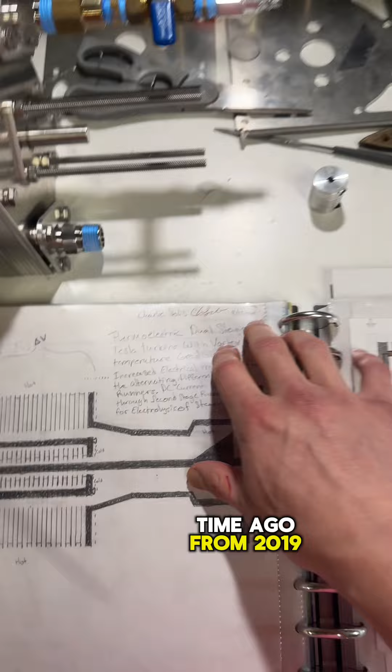So I want to show you all something today with the Tesla turbine that I came up with a very long time ago. Around 2019 I had at least drawn this, but I figured this out a lot earlier.

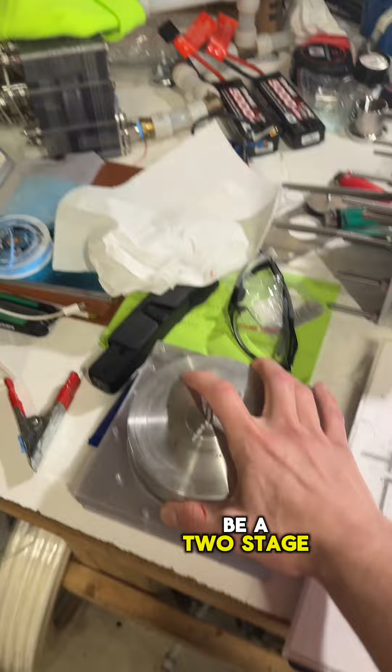So I had been working on the turbines. This was one of the very first ones I had. Maybe you can see through it. Yeah, you can see through it there. This was supposed to be a two-stage, kind of like this, but it was just missing the center. So it went into these small ones right here, and then there's holes inside of here. You can't see that transition between the two stages.

Well, the point of all this was, one of the original design features that I had put into this system was that I had come up with a thermoelectric disc stack, where each of the discs of the turbine was made of a different type of metal. If you look here, I'll pull up a thermoelectric. You use two dissimilar metals and you have connecting tips, and then you have them connecting at the bottom.

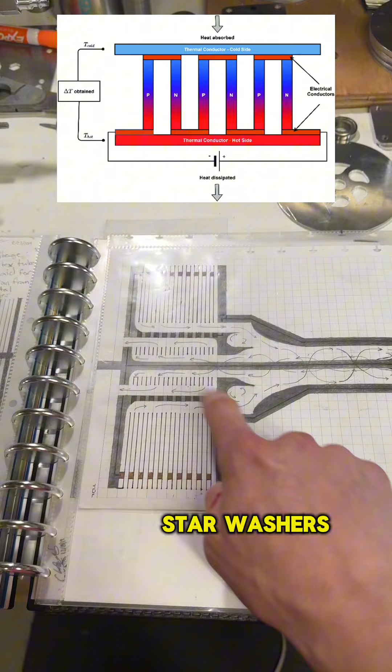And what this would require is alternating conductive and non-conductive star washers that provide the every other connection. And then up at the top here, we do alternating conductive, non-conductive spacers. I have mica spacers and I had copper spacers to do inside of here. Ignore the blood on my hand.

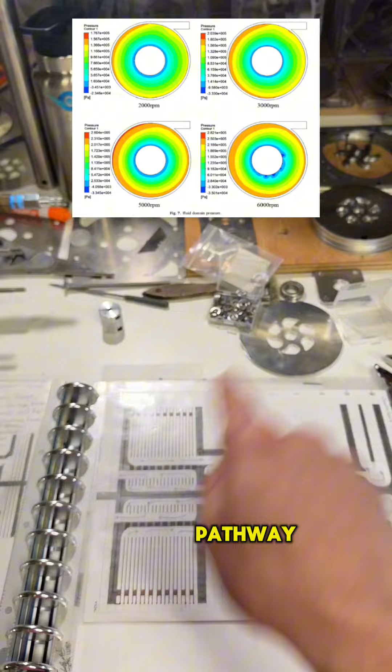These discs get sharp. So the point of this was, when you have a Tesla turbine, the fluid does expand first in the nozzle, but then it still has a chance to expand through the spiral pathway going through the turbine. If that motive fluid is expanding going through the turbine, that means it will be cooler by the time it gets to the exhaust in the center. What that means is there will be a temperature thermal gradient from the tips of the discs to the center of the discs.

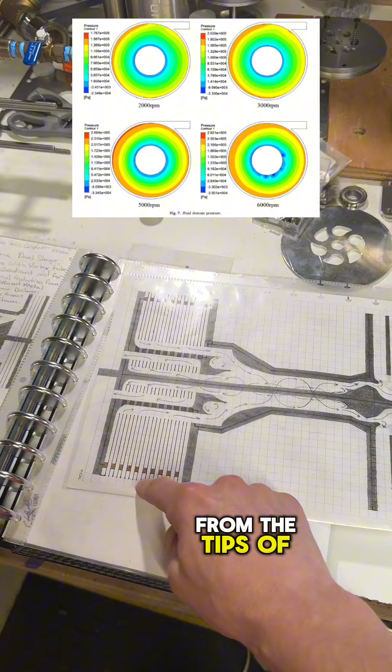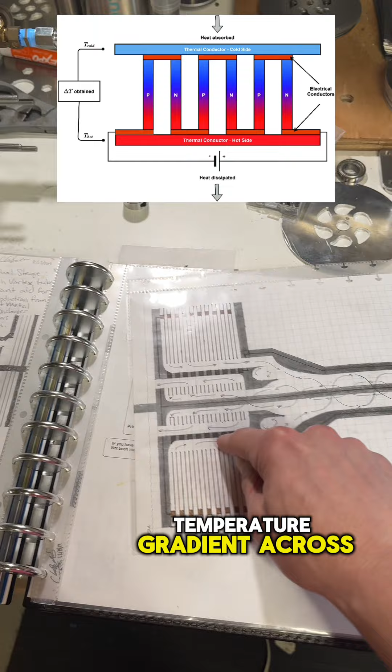As such, with this thermoelectric disc stack, with the proper alternating star washers that are conductive and non-conductive, and alternating tip conductive and non-conductive spacers, this creates a thermoelectric circuit. The radial temperature gradient across the disc stack from the tips to the center generates a DC current flow through the axial direction of the disc stack that snakes up and down.

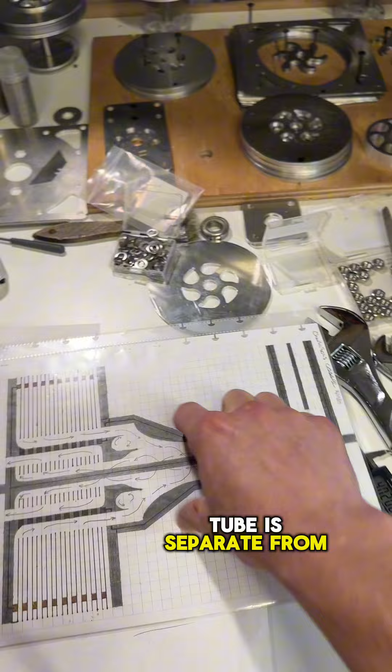What happens here is you take this current and you discharge it so that this tube is separate from the center shaft, so that the positive goes to this center shaft all the way to the outside set of plates, and then the negative goes around the tube on the outside and goes to this set of plates.

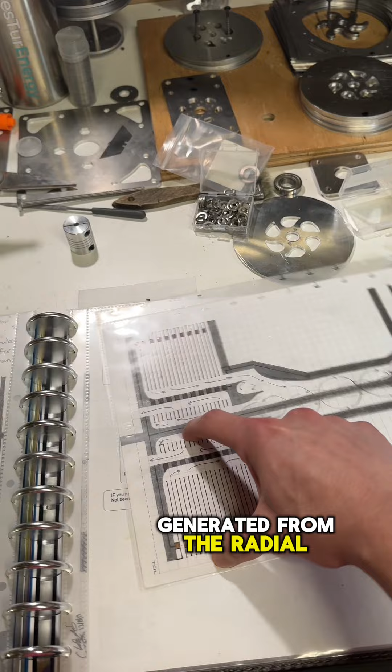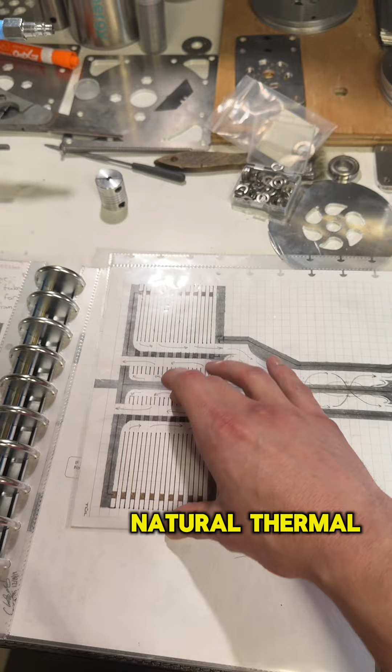So whatever the potential gradient of voltage across the disc stack here, generated from the radial fluid temperature gradient, will produce a voltage potential across the second stage disc stack, which is then used for electrolysis of any remaining fluid. We're already going to have this natural thermal gradient, so by utilizing this to make electricity with it, it actually turns part of the turbine into a solid state electric generator.

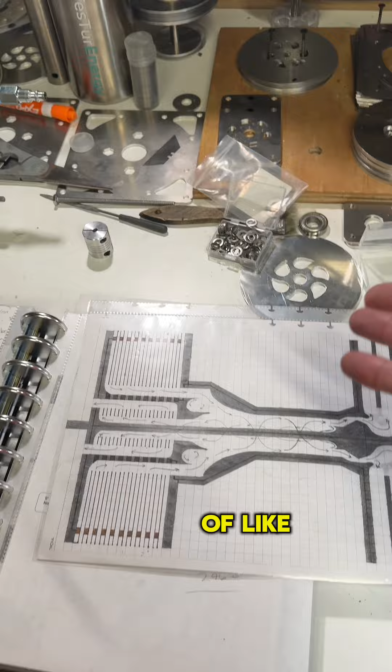Why that's cool is that means inside of like a plane or a turbine or a turbojet engine, before the turbine's even spinning up, you could use the disc stack as an electric generator to power onboard electronics or whatever you want inside the thing, without having to actually have the turbine even spinning.

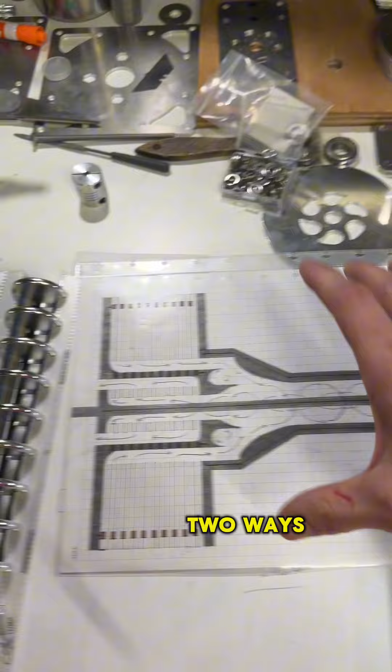That's the whole point, was that it has two ways of making power. Once with rotational mechanical power, and twice with the thermoelectric effect across the disc stack.

Corollary, then, using that disc stack in a many disc stack electrolysis device, you then get a thermoelectric hydrolysis Tesla turbine that uses the thermal gradient from the radial tips to the center to produce a DC voltage potential.

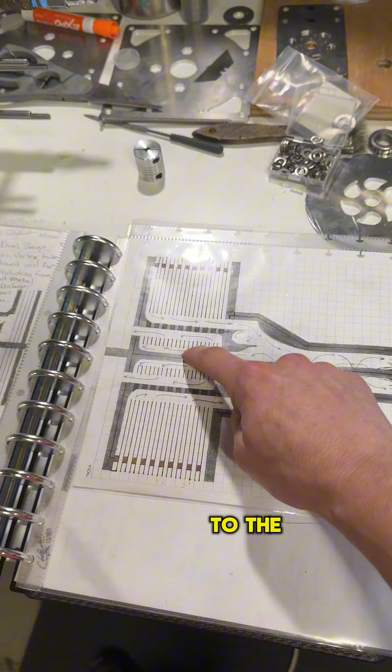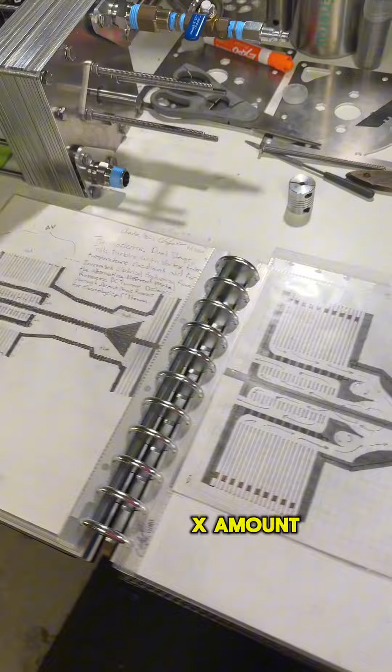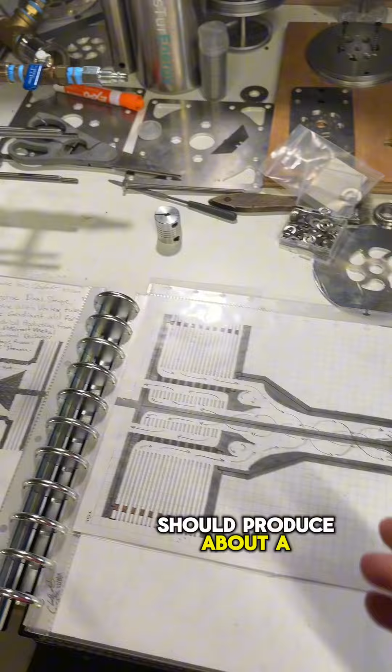And now the math I had done was I needed about 5-inch discs and about 100 of them. Basic calculations, experiments that I found online, being able to produce X amount of voltage with a single strip of metal that was about the same length. And I did the calculations. About 100 discs with an 80 degrees Celsius temperature gradient should produce about half a kilowatt and be able to attain at least a 1 to 3 voltage potential.

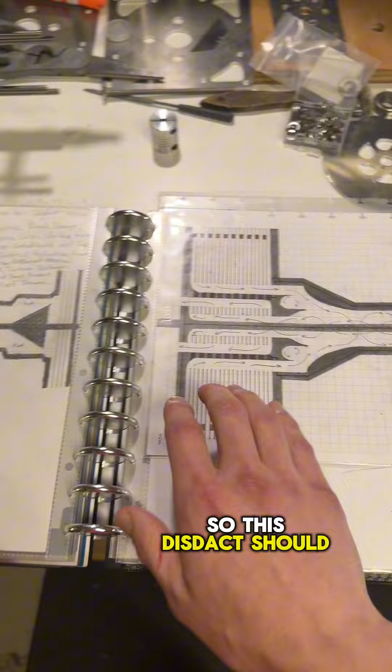And if you know electrolysis, you need at least about 1.4 volts. So this disc stack should be able to generate at least exactly enough voltage to start electrolysis of any sort of condensate that's flowing in the exhaust of the gas turbine, and or if this is a steam turbine and this condenses anywhere.

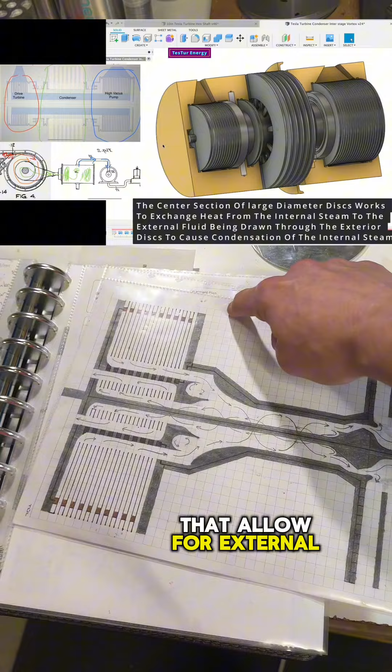If you check out my other video up here, I have what's called the interstage heat exchanger. This makes these tubes here be a bunch of extra discs that go up much further here that allow for external air to come through, go through the extra outside discs, and that cooling, the air coming through, provides cooling. It cools the flow of the fluid that's going through the center here, and the natural rotation of the turbine allows for it.

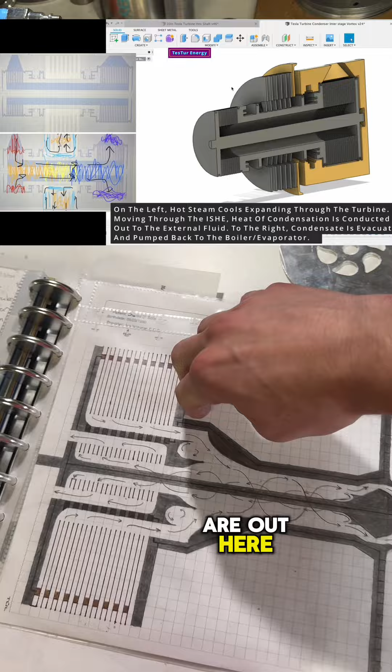Like the discs that are out here provide the heat exchange area and provide the way of wicking, or provide the way of pulling the air and pushing it through, because the disc stack on the outside here works like a blower or a compressor.

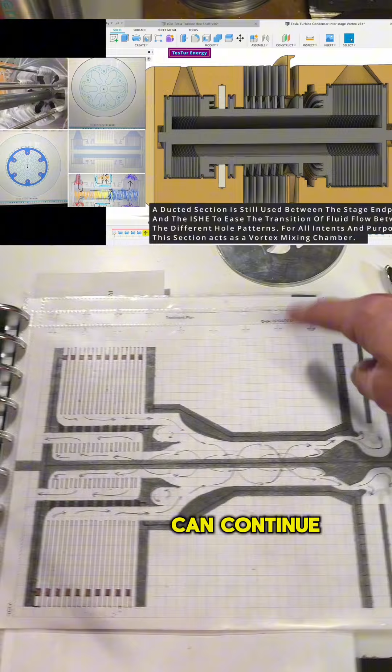So the whole rotary system spinning, hot fluids expanding through here, going through here and out to here. This would be isolated from here. You can see this better in my video, but having this interstage heat exchanger, we can remove heat from anything that's in here. And of course we can continue that thermal gradient across the radius, thermoelectric stack of all the discs.

This temperature gradient here further adds to the power output, or the voltage output here. But if you cause some of the steam coming through here - I think the test I had looked at was an 80-degree gradient from 200 to 120 degrees Celsius.

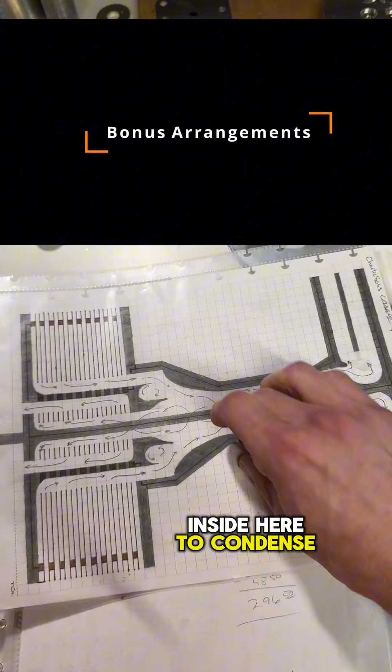And as such, if you can cause any of that steam inside here to condense via the interstage heat exchanger, which preheats combustion air with the heat wicking off the air as it's being flung through it with the rotors, then this moisture that's condensed in here goes into the electrolysis disc stack for electrolysis, to be burnt in a second stage turbine.

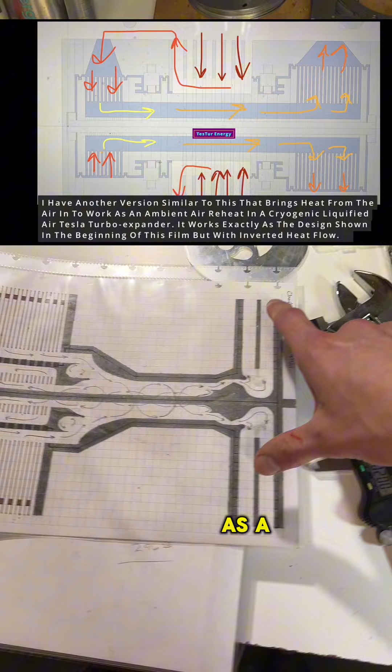And then this disc stack here also works as a second stage high vacuum pump on the exhaust of this. And then this can be doubled up - you can make it dual-sided so that you have positive on this side and negative on this side, so you can collect only hydrogen on this side and only oxygen on this side.

As well, it also works as the compressor for it because it's a disc stack compressor. Separate, so you don't have to worry about any sort of combustion at all.

The really cool part about this is, beyond all of this, I even further took this interstage duct and turned it into a vortex tube, because the fluid coming in is going to be rotating, and as it decreases in radius, it's going to spin up, as this whole thing is already spinning too.

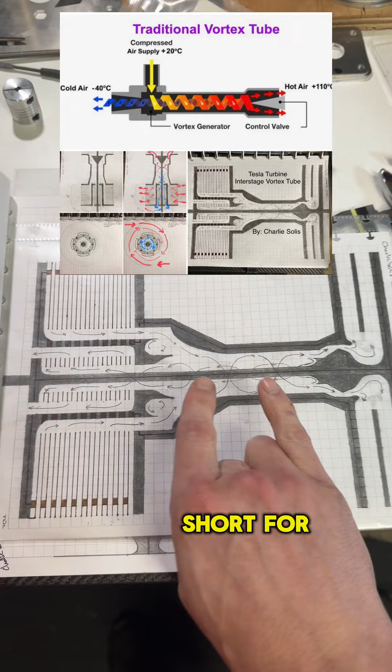The fluid going through here will speed up in its rotation as it comes here. Again, this needs to be long enough - I did it short for the sake of being on the paper and clarity.

But having this vortex tube means only the hot air will come out here, and the thermal energy can go towards some of the electrolysis. It won't be a lot, but it's some.

But why this is the most important is that the colder air is then sucked through, or pushes its way through the slight vacuum, that the inner half of these discs works as a second vacuum pump.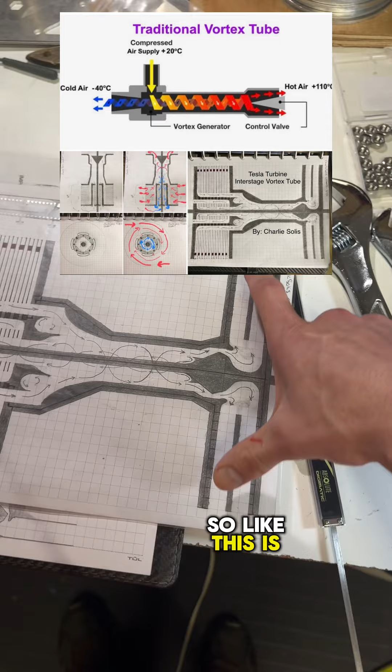So like this is a really large one, but these inner discs allow it so that the fluid comes through here, and then this little short distance of the disc stack - it won't be a lot, but it'll keep fluid going out. As the discs rotate, it draws it out, and then it comes out here.

But out here, the fluid being drawn through here will be cooled, which will further cool this side of the thermoelectric gradient, so that you get an even higher potential output.

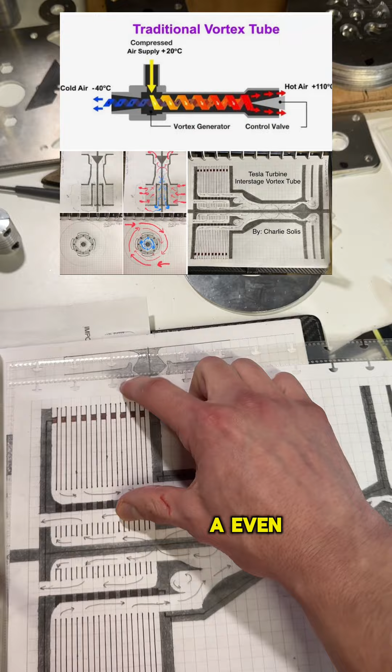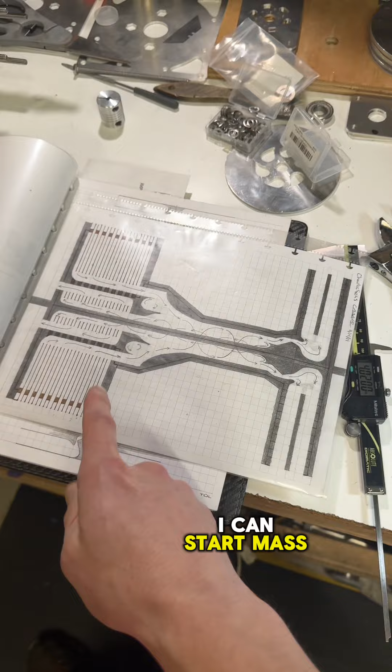This was my big, huge idea that I came up with years ago, and I'm literally just still trying to get these going, because once these are all finalized, I can start mass producing all of this. And I'm steps away from being able to get there.

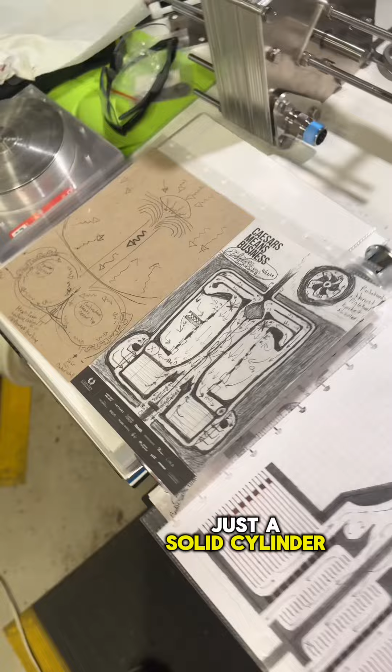And now where this finalizes at, I had then further designed this so that this was just a solid cylinder, if you will, so that fluid coming in does the thermoelectric here, goes to the vortex tube, comes out to the electrolysis disc stack.

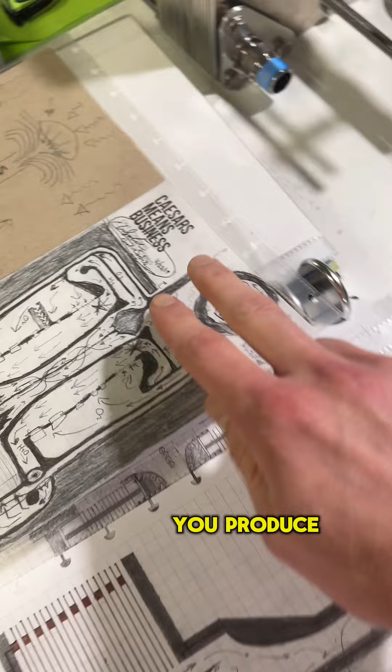You produce oxygen and hydrogen between the two disc sides. Obviously, there's going to be a bunch of little thin discs inside each of the stacks. I didn't draw them, for clarity - again, over here, you'll have just as many discs here as you would on this side and this side.

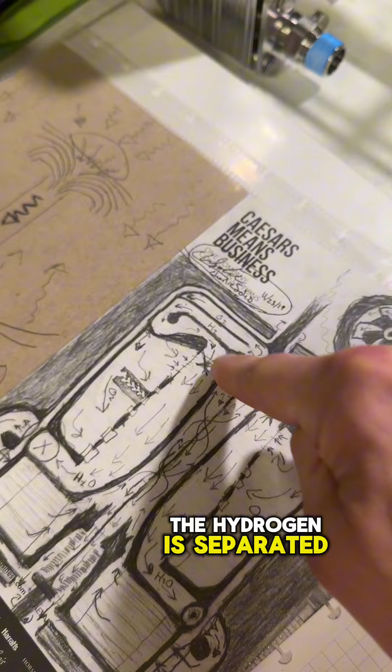So what happens here is you get oxygen on this side, hydrogen on this side. The hydrogen is separated to here. The oxygen is separated to a pre-cooling chamber.

And so basically, I turned that whole section here in between the two stages into the flame tube, or combustion can, that shrouds the center part here. So any heat produced in the combustion of this oxygen and hydrogen goes out to here.

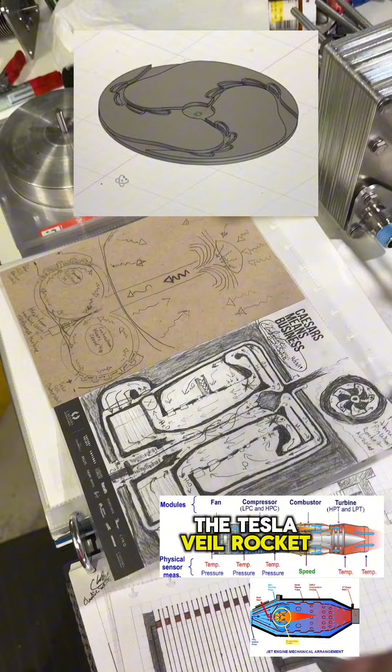And I made it so that these are the Tesla valve rocket rotors, so that all of the combustion from this combustion can ends up going down the length of the multi-stage rotor, burning and then providing reactionary force out.

I just did this for clarity here, but you'll have an input of fluid in here that's coming out, and then all your excess goes out this way. So thermoelectric in cools this tip, creates a bigger gradient, produces more hydrogen and oxygen here.

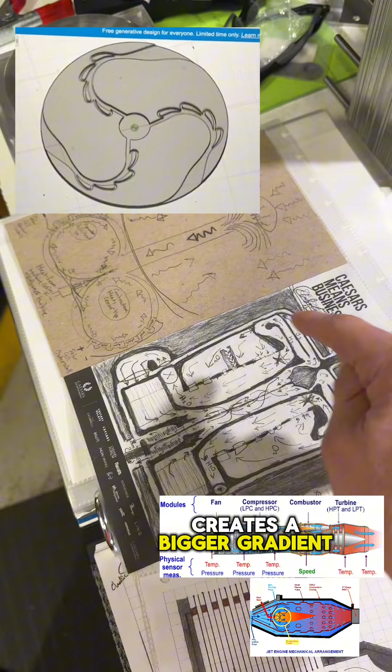Those two are separated. They are then mixed and burnt down the length of this inner combustion can, and then go out radially and then tangentially around the rotor in the opposite direction.

So that the fluid exiting the rotor provides torque in the drive direction with this. So this input will be pointing this way, but the exhaust of this rocket rotor will be pointing the opposite way.

Reactionary torque from throwing the fluid that way, torque in this direction, and then the fluid from spinning in the turbine gets torque in the same direction. So you get the reactionary that way and you get impulse this way, all together.

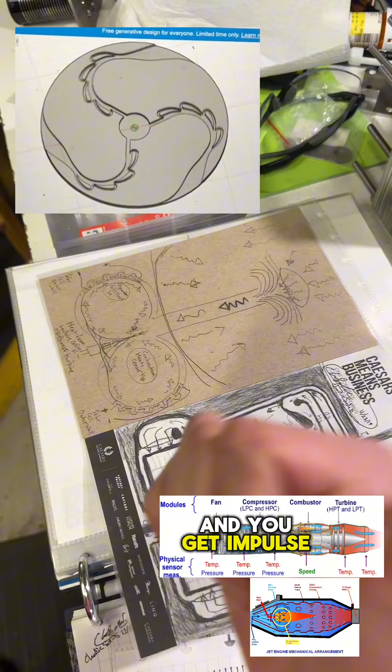And now this could be further separated. You could slide these down, make this as long as you want, like a 4-foot tube if you wanted. Scale it up, whatever you need.

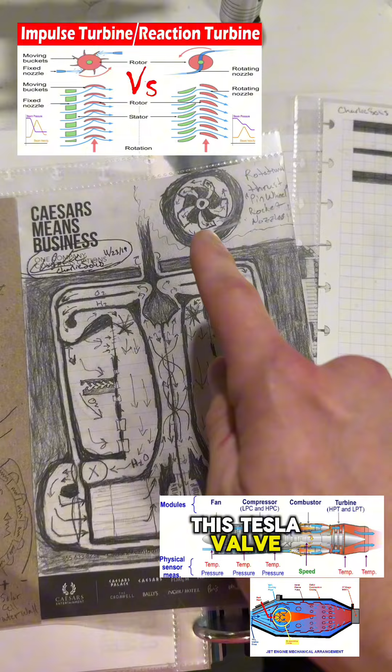You can see right here, this Tesla valve rocket rotor provides a reactionary torque in the direction of rotation with the Tesla turbine, which is impulse driving in the same direction.

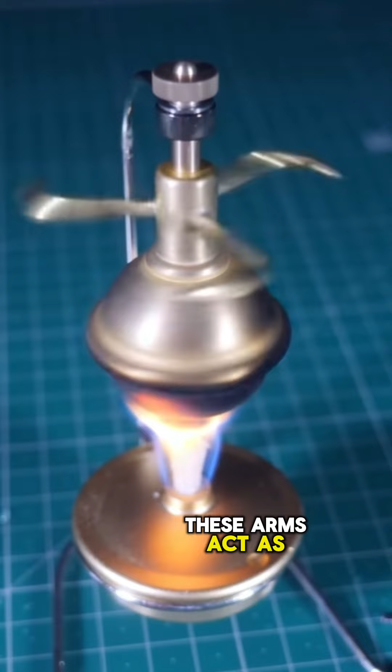Once that water turns into steam, it has no other option but to escape through the tiny nozzles placed in the arms, arranged tangentially to the center of rotation. These arms act as micro-rockets that propel the entire device around itself.

Yeah, this turbine is not a great way of producing power, but it's a great way of demonstrating how reaction turbines work. Tiny rockets propelling stuff around itself. I should probably put that on a t-shirt.

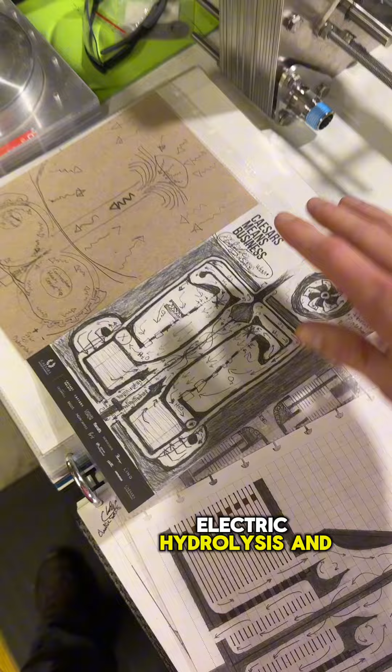So you get thermoelectric, hydrolysis, and reactionary combustion can, flame tube mixing, and Tesla valve rocket rotor, and thermoelectric out, exhausts through here. This could be steam and hydrogen all done in one.

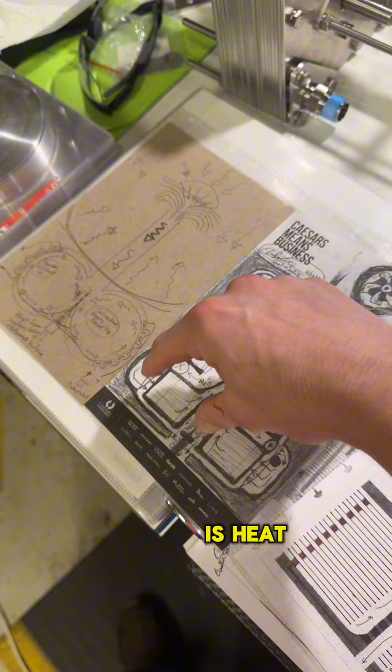So you have steam input. The steam input and temperature gradient from the steam input will build up hydrogen and oxygen inside the rotor here, and then burn it for more torque, which is, again, this is heat gradient from the rotor that wasn't getting used to begin with. So by utilizing that heat gradient, you're making use of some of that energy to produce some more fuel that wasn't going to get used.

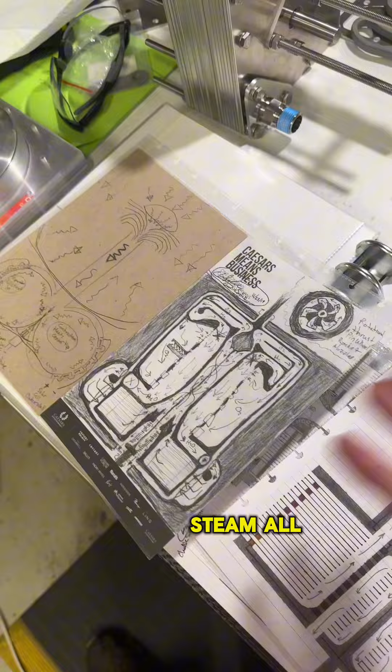And also you're going to get the highest friction heating of the discs from the fluid at the tips, so that'll further add to the temperature gradient alone. Steam input only, and then when you burn the hydrogen and oxygen, well, you get more water, so it just makes more steam. All of that then goes to a vacuum condenser.

Ta-da! Thermoelectric, hydrolysis, disc stack, combustion can, Tesla valve rocket rotor, steam, combustion, hydrogen turbine for both rotational mechanical energy output, and if you want, you can even siphon off some of the DC voltage potential across the whole rotor here.

So, this is Charlie, and what makes him special enough for me to make a video about him is the fact that he built this weird turbine.

If you check out Integza's recent video, I'll put it up right here, by doing his gyroids inside of his electrolysis or hydrolysis machine, and then by the end of his video, he decides to start using a bunch of thin discs because you get a ton of surface area.

That was the whole point of this specifically. This was my grand idea that I came up with years ago, and I've been building to it, but haven't gotten there. And I'm sorry, Joel, but you made your video, and I'm like, okay, man, I gotta tell people.

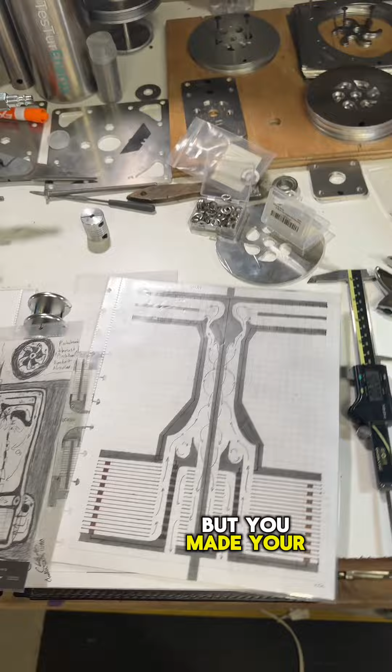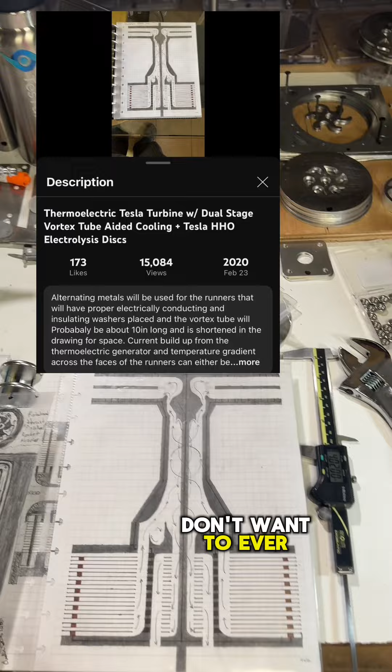I'd already made a video about this years ago. It wasn't very well explained, but I needed it for the timestamp, and you can see it up here on my YouTube channel. No one will ever see it, but I posted it there so I could get a real timestamp of when I actually came up with this.

Hope you guys enjoyed that. This was a good idea, but it was short-lived. It works, but just for a while. It doesn't matter, because I just realized something.

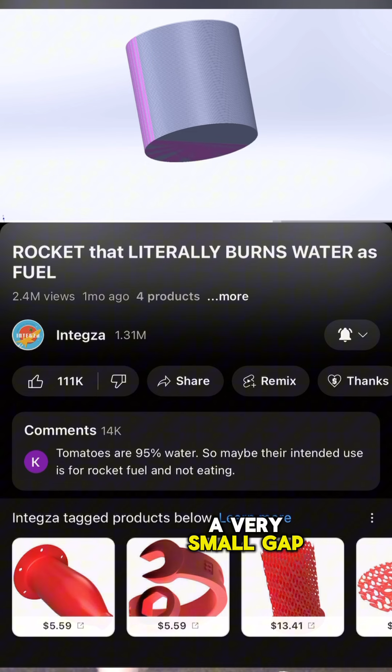This is not the best way of getting the most surface area of a certain geometry. Just think about it. If you have a cylinder, the best way of getting the most surface area in there is to stack a bunch of very thin discs on top of each other that are separated by a very small gap. Half is connected to positive, the other half is connected to negative, and ta-da!

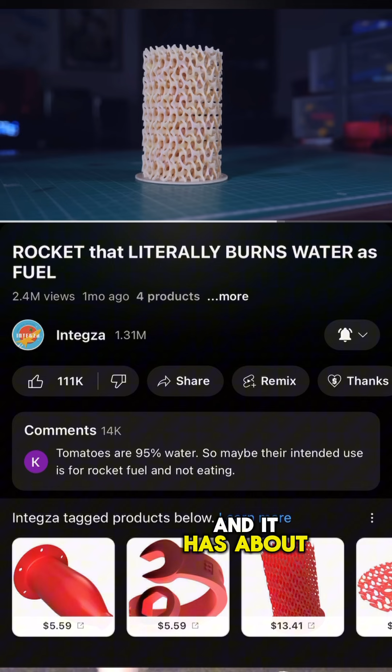Perfect generator. My lattice is contained in a cylinder of 60 mm in diameter and 100 mm in height, and it has about 132 square inches of surface area.

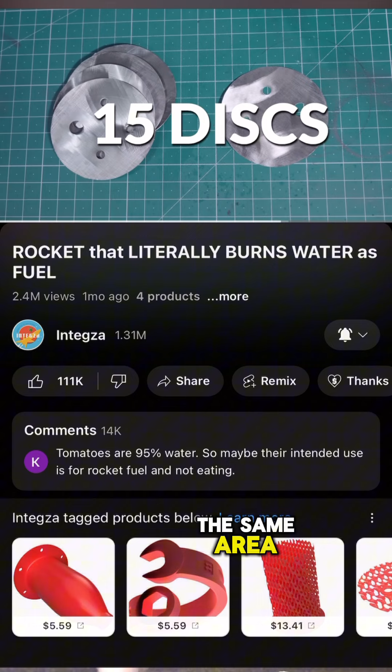To get the same area with 60 mm discs, provided that I use 0.1 mm sheet steel, I would only need 15 discs to get the same area. Even if I use 2 mm spacing between them, that would only be 32 mm high.

For the spacers, I could just use an outer ring with holes on the perimeter, but the steel discs are too thin and need support all over, and not just on the outer edge.

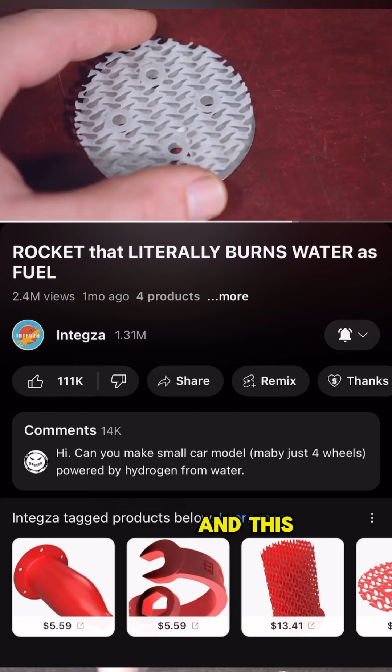Instead, I designed the 1.3 mm thick gyroid spacer. In this way, the disc has support all over, and because of the unique geometry of the gyroid, the gas doesn't get trapped. I am actually pretty proud about this design.

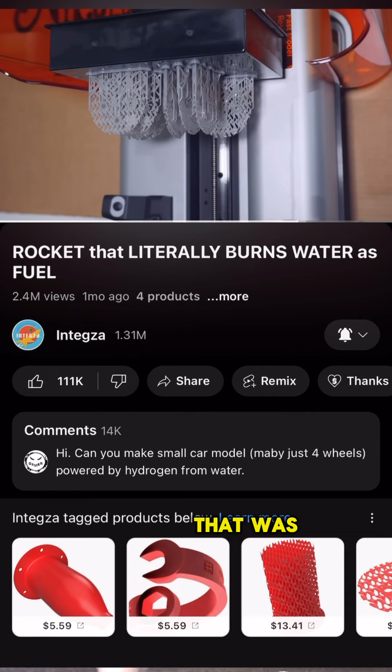The spacers I printed in my Form 4 in batches of 10. That was easy. The hard part was removing all the support material by hand. It took me an entire morning to do that. So this works like this.